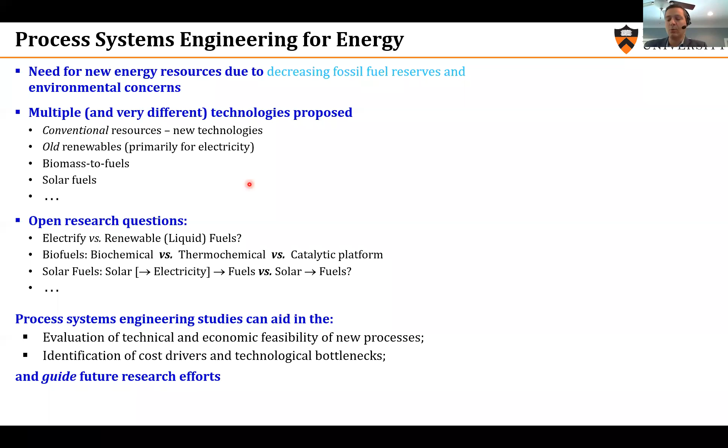So let me start with process synthesis. At a high level, there are two schools of thought in process synthesis. One is where we decompose the problem into easier problems. This is a schematic, a very simple schematic. At the very heart of any chemical processing facility, there should be a conversion, a chemical reaction. So the idea there is to come up with a design for the reactor network.

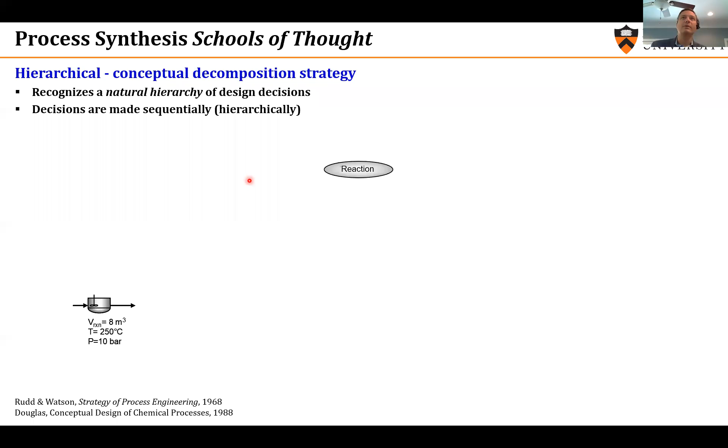Once we have made these decisions, obviously we will need separations, because in real systems, for example, conversions will not be 100%, selectivity is not going to be 100%. We will need to design a separation network around that. Then once we have made our decisions about reactions and separations, we would have some heating and cooling duties, distillation columns, we would have both of them. How do we then do heat integration? So around that, we're going to design our heat integration and potentially utility system.

So this is a very intuitive way to think about this problem, and very elegant, and can be very effective, because the problems are easier, but it does not account for interactions.

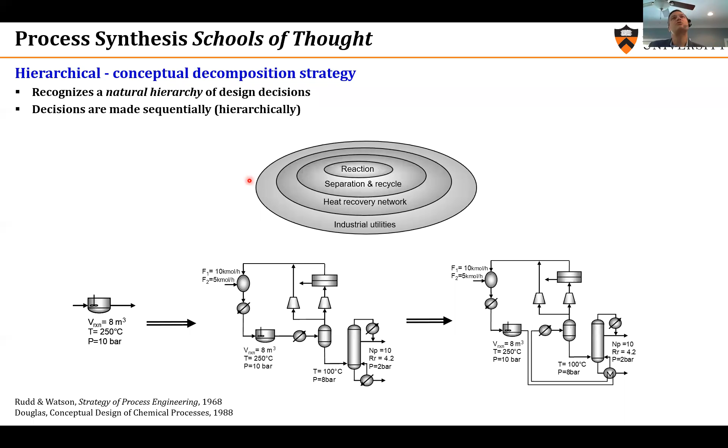The example that I often use is that when we are trying to, for example, maximize selectivity in a reacting system, we may do that, but by maximizing selectivity, we may lead to small production of a byproduct, which forms an azeotrope. So although from a reactor standpoint this is a good objective function, if we think about the entire system, that's not a good objective function, because with an azeotrope, our separations network now is going to be inefficient.

So what's the alternative? The alternative is what we call superstructure optimization, where all the options—although I'll come back to this, this is not a straightforward exercise to find all the options—but in principle, we would have all the options mapped in a superstructure.

So here I'm showing, just to illustrate the points, very simple decisions. We're going to install a CSTR or a plug flow reactor. So we're going to choose one of them, and we will either use a sequence of distillation columns or adsorption or membranes. So all the options are there. So it's not a process flow diagram, it's a network, parts of which are going to be activated and deactivated.

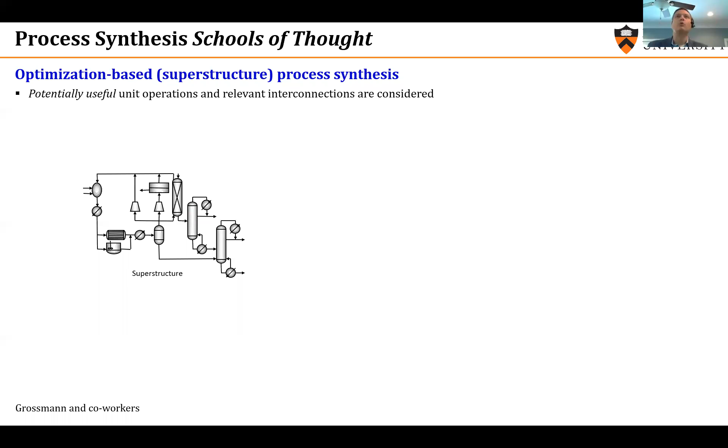How are we going to do that? We're going to generate a model that is different from a traditional process model because it has discrete decisions, binary decisions, these Ys.

And these Ys, if we can solve this model, which I have written here, will tell us which of these units are going to be active in the optimal solution. And then for the units that are active, we're going to calculate as we would normally do process flows, temperatures, pressures.

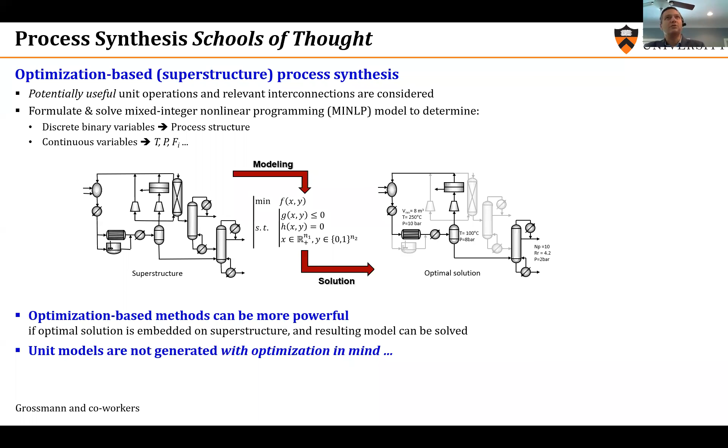So this approach appears to be very powerful, but it has a big, big challenge, and this is the computational issue. In the next slide, I'm going to show the equations that this process simulator would automatically generate if we were to perform a simulation. They are not meant to be understood, all these equations - I just want to convey the complexity.

So it's a multi-tube reactor for methanol synthesis. For the students in the audience, we maybe just draw our unit in Aspen or the preferred simulator - what is it really behind it? If it's a detailed simulation model, we would have lots and lots of equations like material balances, energy balances, kinetics, if we want to account for pressure drop, hydraulics, and so on and so forth.

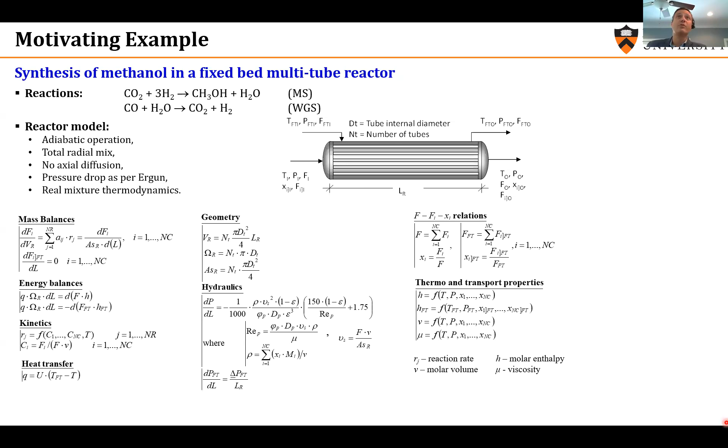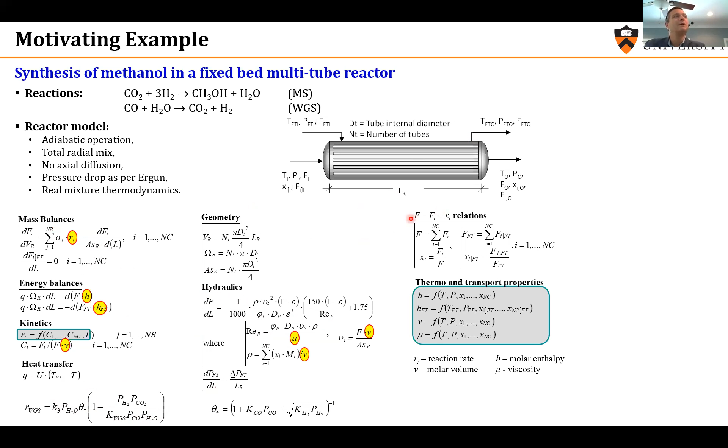And as if that was not enough, some of these letters here are enthalpies, reaction rates, molar volume - they are coming from additional equations, thermodynamics or kinetics. And the last point is that these kinetics, which in this case is water gas shift, would look something like this. We would have these partial pressures in the denominator, and when partial pressures go to zero, numerical stability issues and all that stuff can happen and hinder the solution of the use of these models in an optimization framework as opposed to simulation.

So what can we do? Simplify these models. And the idea is not ours - it has been around for many, many years. Here we are just applying it in energy and processing systems.

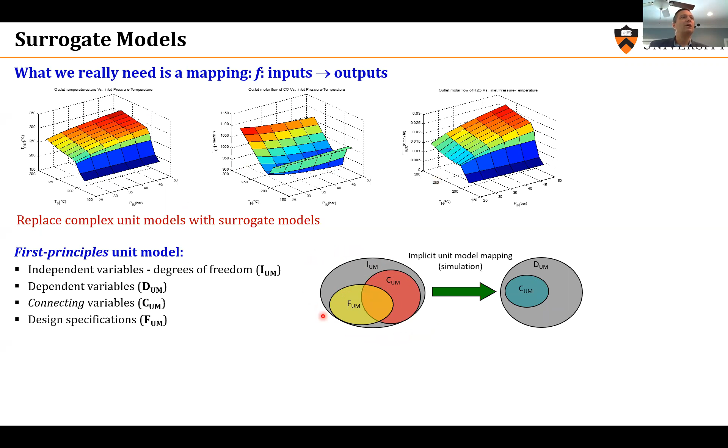So the idea is to get a complex model. Here, what I'm showing is all the variables that we need to have in order to calculate how our system behaves. An example would be in a distillation column, we would have to calculate compositions, flows, everything in every single tray, and replace these models with really a reduced version where some of the variables that are not of interest from a process synthesis point of view are removed.

Where we're connecting different units, these variables are removed. And it's an approximation, so we have to sacrifice something, but it allows us to solve bigger problems. So using again distillation column as an example, if we're thinking about a system that has 10 or 20 different units, maybe knowing what is in every tray is not that important. What is important is the feed of the distillation column, what comes at the top, at the bottom, and the heat duties.

Okay, so I'll go through this slide very fast. I'll be happy to come back later. There are two things then we have to do.

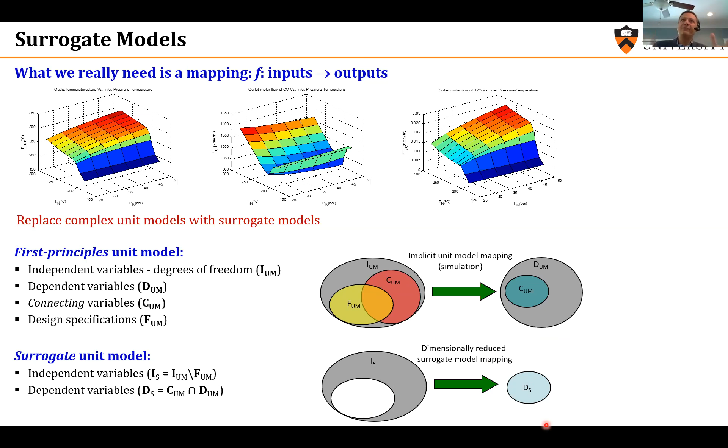Design this surrogate model, this approximation. It's not a completely straightforward question because we're going to remove - in the previous slides, I showed that basically we remove some variables from the original model. What we are left with should behave well numerically, should not be singular. And this turns out to be a graph theoretic problem where we form a graph with different variables and different equations. We solve this problem, and the solution is going to tell us what the right input variables should be. And from these input variables, we calculate the output.

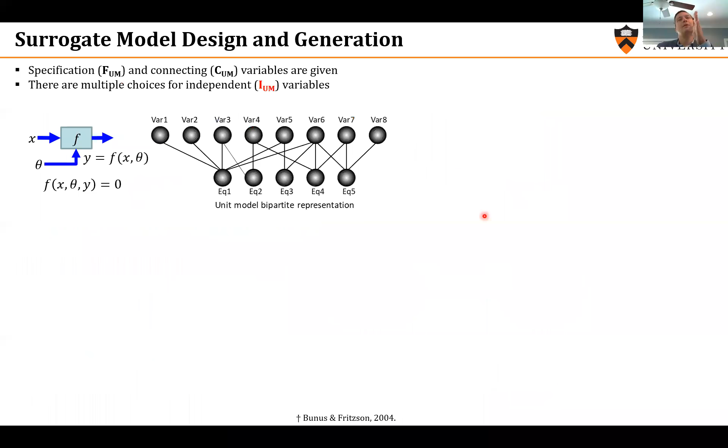The second question then is, how do we write this model? And we should not replace everything. This is a reactor model, and I'll just go through the first two equations. This first equation basically says what comes out of the reactor - this is a summation where all the flows are equal to the flows that go in plus stoichiometric coefficient times conversion. So this equation is very simple, very intuitive, and we don't have to replace it.

What's the tricky part? That this conversion of reaction happening in the reactor can be very tricky. Energy balances, similarly, relationships about temperatures - we don't have to replace them.

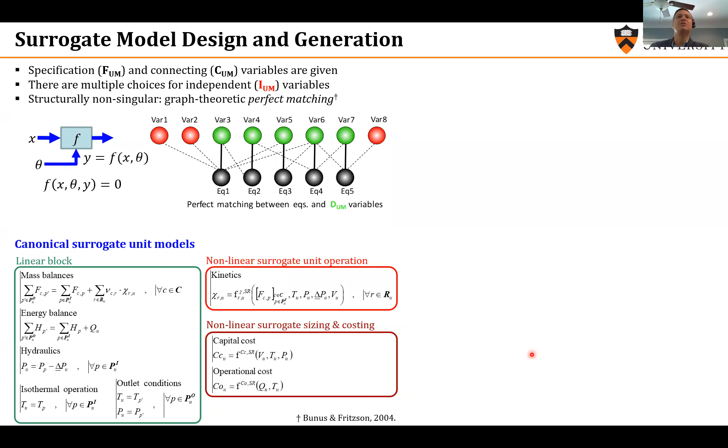What we really have to replace is this conversion, because it's going to depend on kinetics and it's going to be complicated. Once we have made these decisions, then it's a fitting exercise. I'm not going to go through the details. We can use different fitting methods.

Artificial intelligence is very trendy. We can use the preferred method for developing these simplified models based on data that come either from simulations for a given unit or from experiments. And actually, in our experience, a lot of systems that we have studied are based on experimental data coming from collaborators.

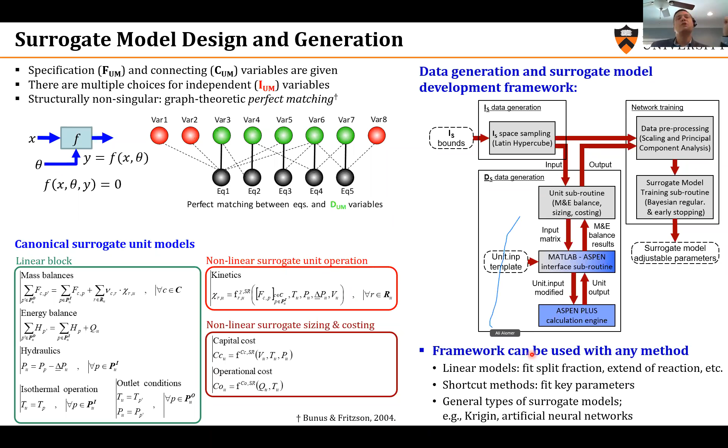Okay, so we have done that. We have simple models for each unit. Are we done? Unfortunately, there is one more step, and that's where now the optimization challenges come in.

I'm illustrating this through an example where, for the sake of simplicity, let's assume I have 3 reactors, and somehow we have developed a model where we have only 2 input variables, x1 and x2. But we still have to select which catalyst we're going to use in this reactor.

If we go with catalyst 1, this is the objective function. Let's say we're minimizing cost, given certain output. It is a very easy problem, right? It's a feasible region that is convex, a single minima. Even if it was like this, it would still be an easy problem.

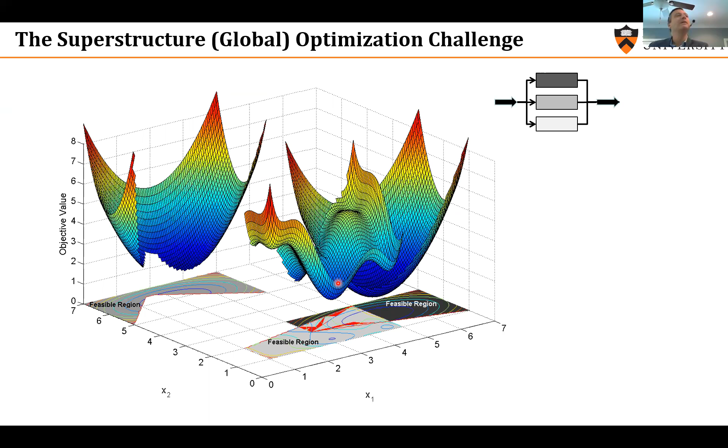But maybe the feasible region is not convex. It has this shape, which means that we have 2 minima, or the objective function has multiple minima. And really, the problem we are trying to solve pictorially is something like this. We have to first pick the reactor, and then for this reactor, solve the optimization problem. So this is challenging, and really the group is trying to develop methods to solve these problems.

This is my last slide on process synthesis. So in general, what we would like to do is develop good methods for solving these process synthesis problems. And as you will see later, one of the reasons we want to develop these efficient models is because we want to solve lots and lots and lots of optimization problems.

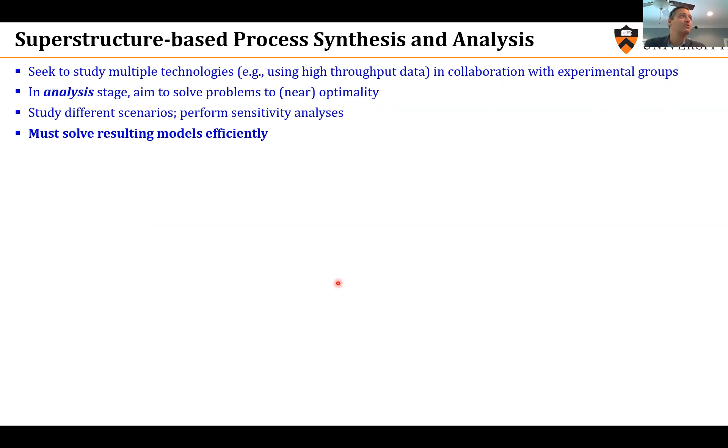Because this is for preliminary studies, right? It's not to build a facility that is going to be utilizing, let's say, the latest solar thermal technology. It's more to get the results that would allow us to understand these systems better. And to understand the systems better, we have to run many, many optimizations under different scenarios to really understand the drivers. So that's our goal.

What I described very briefly is that we can think of it in 2 ways. One is develop simpler models, and I will show later that sometimes these models are sufficient for these preliminary studies, and that experiments also can be used to develop these simpler models. That's one. Then at the second level, assuming we have these simple models, we want to develop good optimization methods for this class of problems where we're making discrete decisions and continuous decisions.

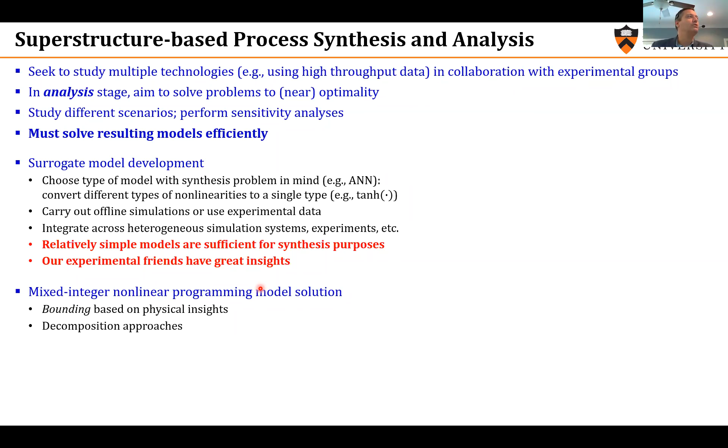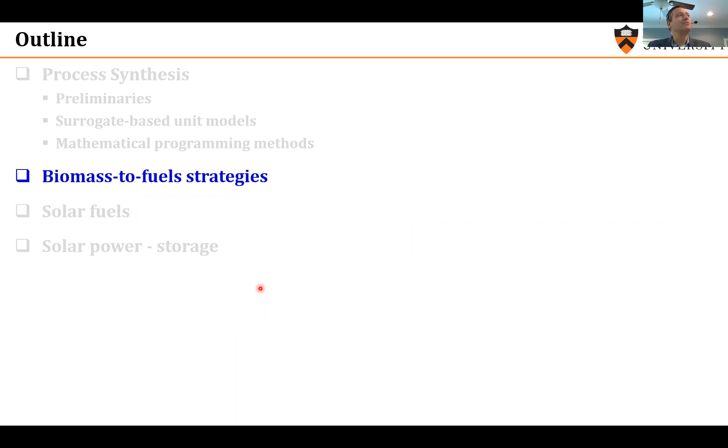Let me now go to the applications. The work has worked a lot in the area of biofuels, but I chose to focus more on solar systems. I still wanted to discuss two examples. The first one is just to illustrate how superstructure synthesis applies to a real case, a real system with experimental results.

So how we can use superstructure synthesis to think about the system. This is a pre-treatment of biomass. Biomass is harvested, is brought to the biorefinery, and the first step really is to break this very recalcitrant, very resistant mixture of lignin and polymers of sugars.

So a colleague of mine at the University of Wisconsin developed a series of pre-treatment technologies 5 years ago now. This is a very nice system from a basic science standpoint and a catalysis standpoint, because we are using GVL, gamma-valerolactone, which is a solvent that can be made from biomass, as the solvent to carry out this pre-treatment. So it's very efficient.

It has received a lot of attention, but the downside is it leads to a complex separation system problem. Why? GVL here is our solvent, so somehow we want to recycle it, we want to be able to use it again. Sugars is the valuable intermediate, or the most valuable intermediate, because it's what we want to convert finally to a chemical or a fuel.

Lignin, we also want to separate from everything else because it can be used to generate power. So how do we carry out this separation? One option, experimentally found, is that we can add salt. If we add salt into this system, we're going to have two phases: one is the aqueous phase, which has sugars and primarily water with a little bit of GVL, and the other is the organic phase, which has GVL and lignin.

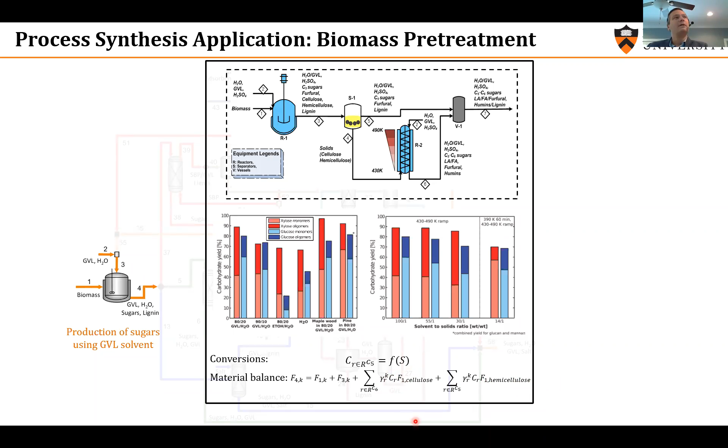So this was an example of a surrogate building from experimental data. Once we have this process network, separation network, we can start thinking about utilities, about heat integration, and the other parts that I described earlier.

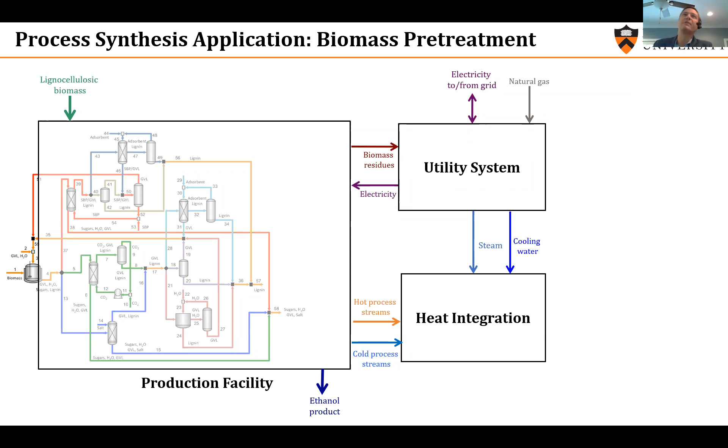Okay, so I went a little bit through the detail. I won't be doing that again. I will just now start presenting results directly from different systems.

Last slides on biofuels. In the States, there has been a lot of discussion about what are good strategies for converting biomass to fuels. The Department of Energy and others have suggested that what we really have to be doing is maximizing carbon yield. So we wanted to really test this hypothesis, whether the best criterion for choosing these strategies is maximizing carbon yield.

That is, the carbon in the final fuel given a fixed amount of carbon in the input. So to do that, there are 2 systems. One is the very traditional ethanol, biomass to ethanol, and then another one, which again was based on experimental results from our collaborator Professor Dumesic, going to alkenes. So these would be hydrocarbons, basically using chemical catalysis.

At a very, very high level, in these two figures, panels A and B, I'm showing just the final results. We see that if we are producing ethanol, we start from 1 ton, which has a certain amount of carbon in the 3 major components, and finally we get 159 kilograms of carbon in the final product, in ethanol.

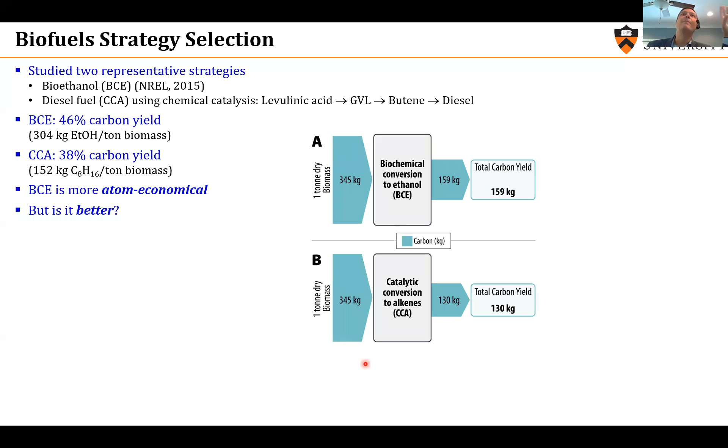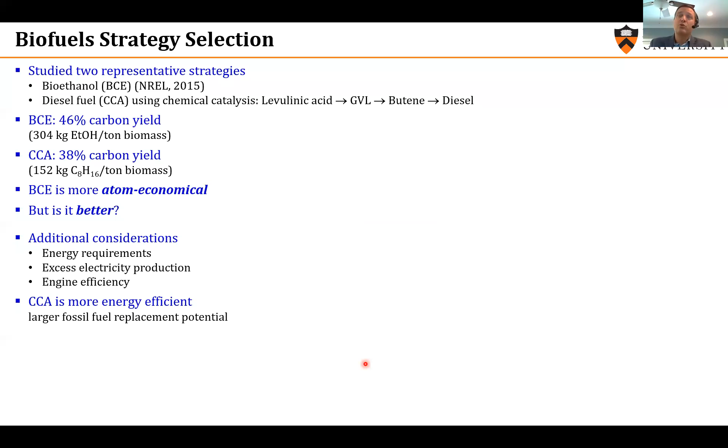So I'm going to be showing in the next animation a different figure. It has the same reference, but we are thinking about energy flows, not carbon flows. And we would like, when calculating these energy flows, to also think about excess electricity that can potentially be produced in the biorefinery, because remember, lignin can be burned to produce electricity.

And also the final use of this fuel. So again, here we have 1 ton of biomass as the starting material, but everything else is energy flow. We are producing this amount of energy in the form of ethanol, still more energy than in our liquid fuel, but two big differences. One is that one of the reasons this yield is lower is that some residues cannot be converted to fuel in this case, but they get burned.

So if we think now, this biorefinery produces more excess electricity, which is going to be used, to keep the same reference, by an electric car. The electric motor has higher efficiency. So finally, if we do the calculation in terms of total mechanical energy, which is a better equivalent of the fuel that would be displaced, we find out that this is a better option. This biorefinery would displace more fossil fuel than this biorefinery.

The conclusion of this study really was that it's not only the carbon yield, but it's also the biorefinery efficiency, because this is reflected in the amount of excess electricity that we're producing, and the fuel quality, that have to be taken into account when we are deciding what conversions to make and what strategies to adopt.

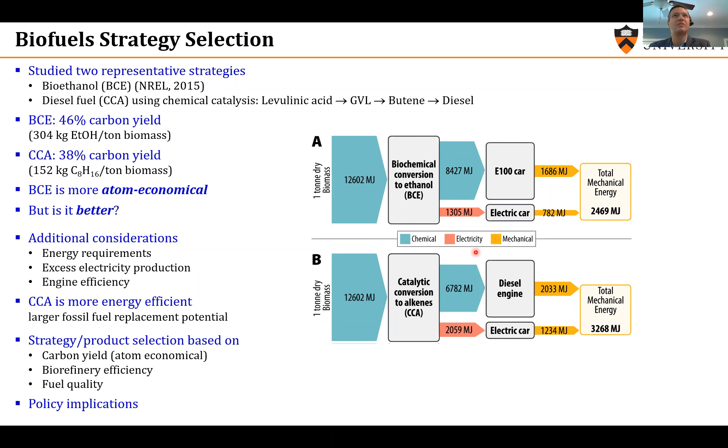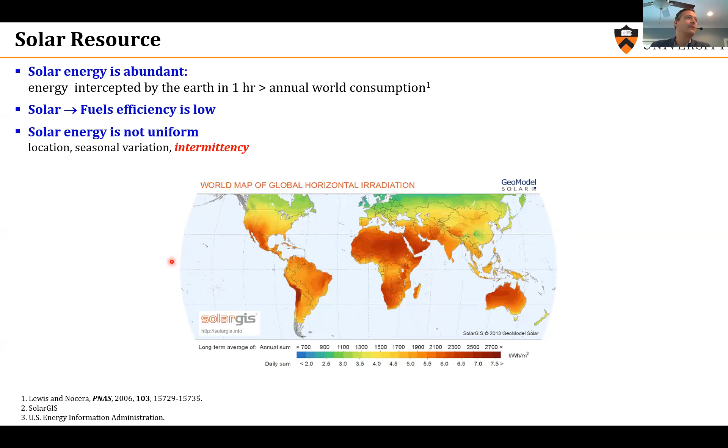So, what we would like to study in this part of the talk is to understand how to use solar energy to go to liquid fuels, not electricity.

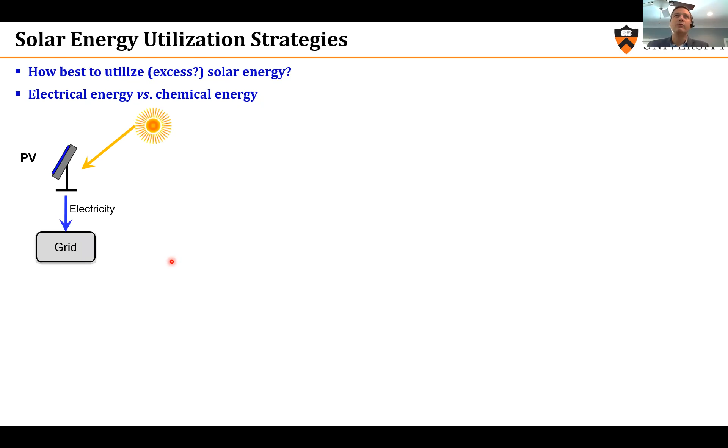Now, just to set the stage a little bit and put everything in context, if we ask the question, how is it best today to use solar energy to go to liquid fuels - and many papers have shown this, this is not our calculation - it seems that this is the best way. We still go through electricity, but then we use excess electricity to do electrolysis. And then once we have hydrogen, we can go with hydrogen to liquid fuels. This pathway has an overall efficiency of roughly 7%: 30% photovoltaic, 80% electrolysis. These numbers are rough. You may disagree, but they give you a rough idea of the efficiency of this pathway.

Now, before we continue, an interesting observation is that if we stay with electricity and we use storage - we're not talking about cost right now, just efficiencies - actually, using it directly in an electric motor has higher efficiency. But we still need liquid fuels for planes, heavy trucks.

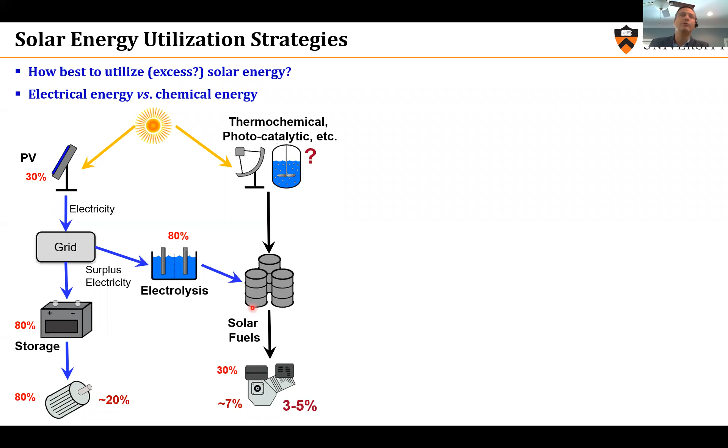So the question is, given that this appears to be the best pathway to liquid fuels today, what would it take for a direct conversion of sunlight to liquid fuels? How good should we make this direct conversion to compete with the current pathway? What would it take to reach, let's say, 3 to 5% efficiency in this direct conversion? I'm saying 3 to 5 because I haven't accounted for the conversion of the incorporation of the renewable hydrogen into a liquid fuel.

So we would like to study this really direct conversion, which is not so direct, is not a simple block. The idea would be to have what we termed a solar refinery, where we would use solar to generate utilities, heating and electricity that may be required, for example, for pumping, but not for the chemical conversion. There are many different technologies that have been proposed for these direct conversions. We are not going to focus on the specific technologies. We want, at a higher level, to ask how good should these conversions be to reach this type of numbers. And then potentially CO2, the carbon can be coming from capture, the water can be coming from other sources.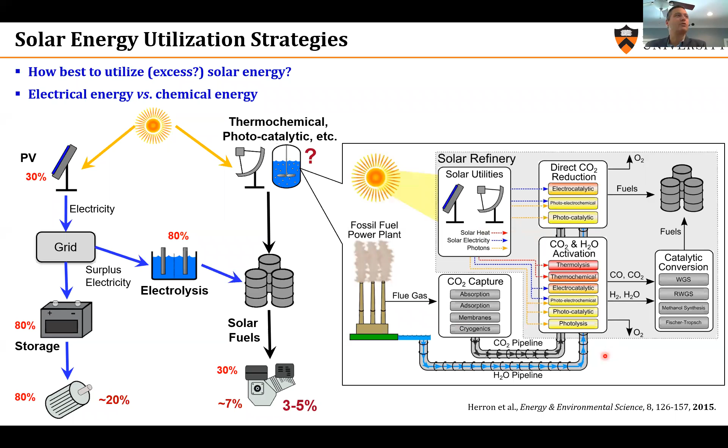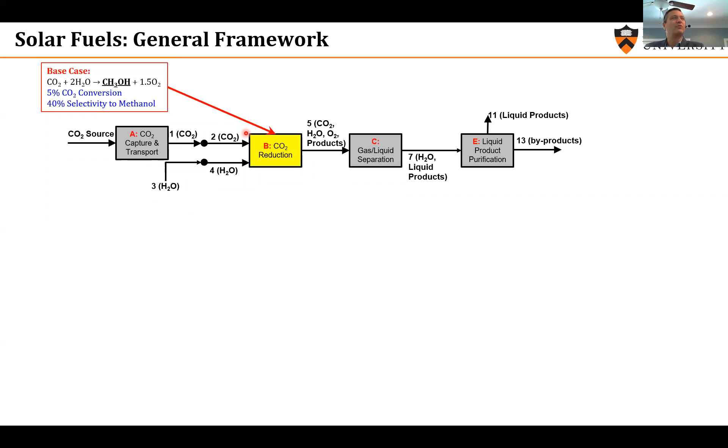We went to the literature. This is now a few years old, but I believe that these numbers are still relevant: 5% conversion of CO2 and 40% selectivity to our methanol.

At this point, we are spending 7 times more than the energy that we are producing, but we have started at these low numbers. So then the question is, what advances are needed in catalysis and reaction engineering to make this system better?

One note about the metric that I will be using. I think what sometimes is not thoroughly appreciated is that we should have a common energy basis. So one could say, okay, we do the simulation, optimization, we get our flows, temperatures, and we calculate heat and electricity required to run this system. And we compare this heat and electricity with what we are producing here.

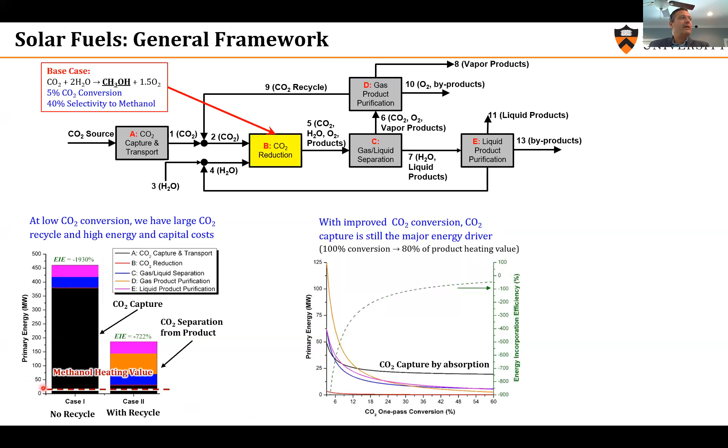Okay, so let's see some results. Maybe another thing I want to bring to your attention: the energy present in 1 kilogram per second of methanol is roughly 23 megawatts. So this is the energy requirements to run this facility as we increase conversion and change the energy required to capture CO2. As expected, we see the energy decreases as we move here.

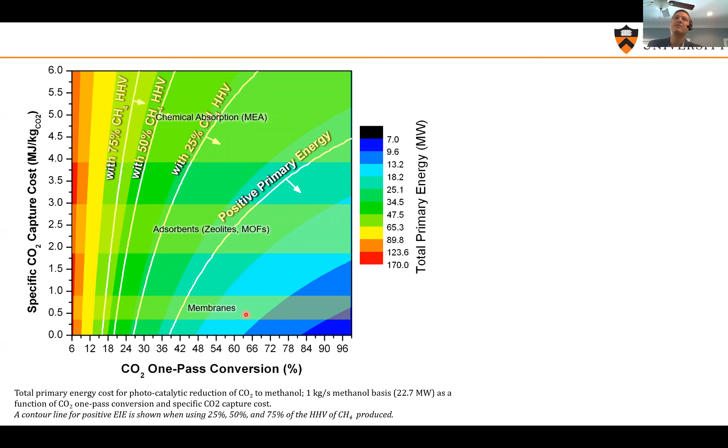I want to show some numbers about cost. What we realized very soon is that block B, the yellow block, which is about the reduction, is very, very expensive. The activities of the catalysts are very low, so we would need very big reactors. The reactors would be expensive, the catalysts would be expensive. So this is definitely the cost driver.

The minimum selling price can be viewed as the break-even price, the price at which we should be selling our product to just cover our expenses. So the higher this minimum selling price is, the worse the system is. We want low minimum selling prices, indicating that we are breaking even without selling the product at very, very high prices.

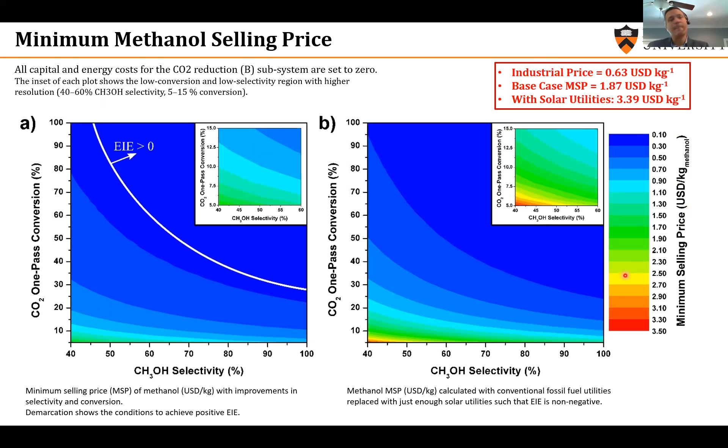Okay, last part of the talk: solar power and storage. We're going to be using concentrated solar power, although it could be used also with another technology for the production, let's say parabolic trough or other systems. We want to think about how we can use solar energy when the sun is not shining.

We are going to be using kind of an exotic system. We are not obviously the first to think about this problem. Photovoltaics combined with batteries have been studied. Concentrated solar power with two tanks, where basically during the day we are generating a very hot liquid and using it during the night, has been studied.

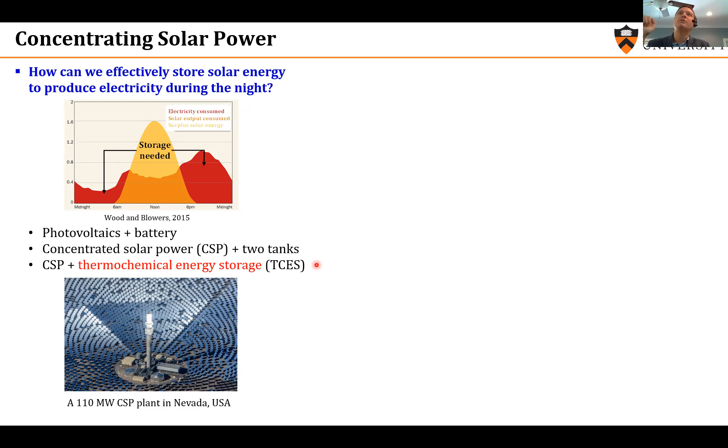What we want to understand a little bit better here is thermochemical energy storage. So we are running an endothermic reaction when the sun is shining, producing a high energy content product or mixture of products. And during the night, we run the reaction in the other direction, producing heat, and we're using that heat for electricity production. So that's the idea, and this idea leads to a very interesting process synthesis problem.

It's a very interesting process synthesis problem because it's not the typical problem where we are thinking about a nominal operating point and then relying on control to keep us there at steady state. We have two completely different modes of operation. During the day, we run the endothermic reaction.

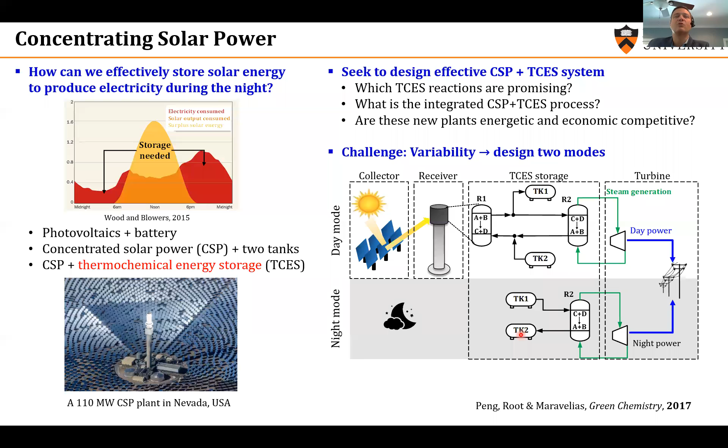So early morning hours, this is full, TK1 is empty. So this is a very interesting system. I'll just spend one slide explaining why this in a way leads to a new type of process synthesis problems, because we have uncertainty, we have variability, right?

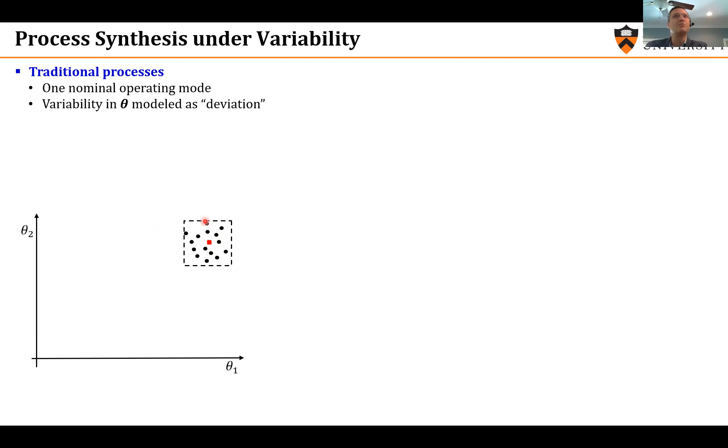And if this is the nominal operating point, a lot of research has been done around designing systems around a nominal operation, right? The feed may not always be the same in terms of amount and properties. The specifications may be changing. So a lot of work has been done around designing around a nominal point.

But here, we have a very different situation where really we have to design 2 different systems linked together. So we have the day operation and the night operation. They are very different, but they are linked. They are linked through these tanks.

We use a technique that is called stochastic programming to account for variability, right? Summer and winter are not the same, both in terms of solar irradiance and duration of the two modes.

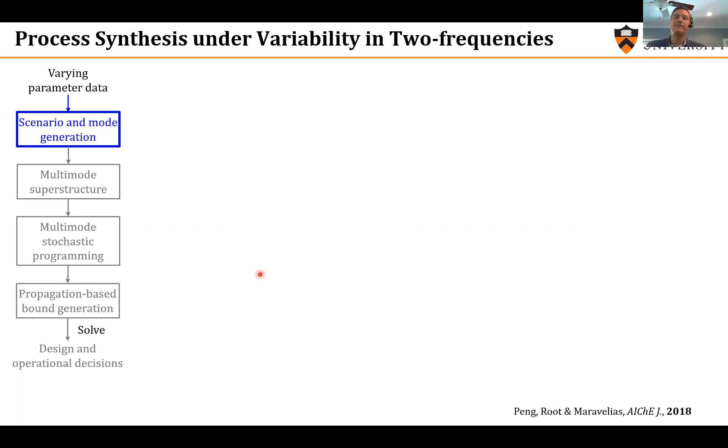So we generate these scenarios to represent an entire year. For each of these scenarios, we generate two modes. We generate, so this is shown here. For each scenario, we have day and night. Again, different days and nights in the different scenarios.

And now our design decisions is what do we pick and how we operate in different scenarios. So these are, in this work, we just used 6 scenarios. We felt that it was representative.

Directly results. The chemistries that have been studying the most are gas phase chemistry. So from ammonia going to hydrogen and nitrogen and back, and then methane and CO2 going to syngas and back.

Underground storage is, I would say, maybe a little bit of an ambitious idea that we can use underground caverns to store these systems. I don't know how feasible it is, I have to say that, but we just wanted to include it in our analysis.

And it turns out that these systems, so when we are using really gaseous products, are not competitive. The reason is that we need so much energy to compress the system, and the compressors and the tanks are expensive. I'll just show here the big picture energy flows.

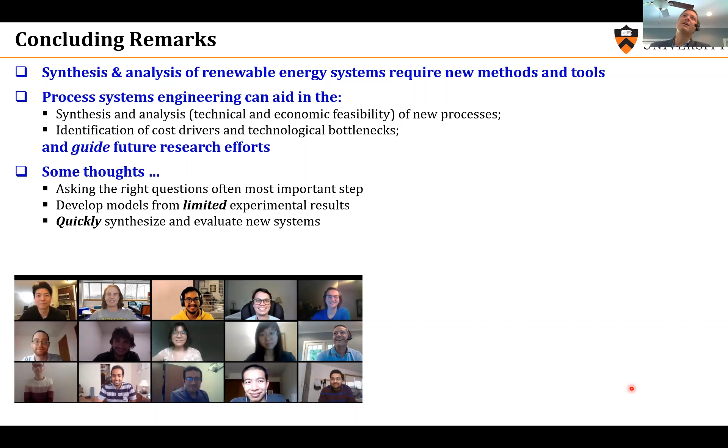And then finally, it's also important to quickly synthesize and evaluate new systems, because research moves very, very fast. If we want our analysis to have some impact, we would have to be able to build these models, get the results fast, so we can have an iterative procedure where the insights are then used for the design of the next steps.

I want to acknowledge the group - all the work, of course, is done by the group members. This is the latest photo from a Zoom meeting. This is, I think, what is going to be happening for some time. And then also some collaborators and financial support.

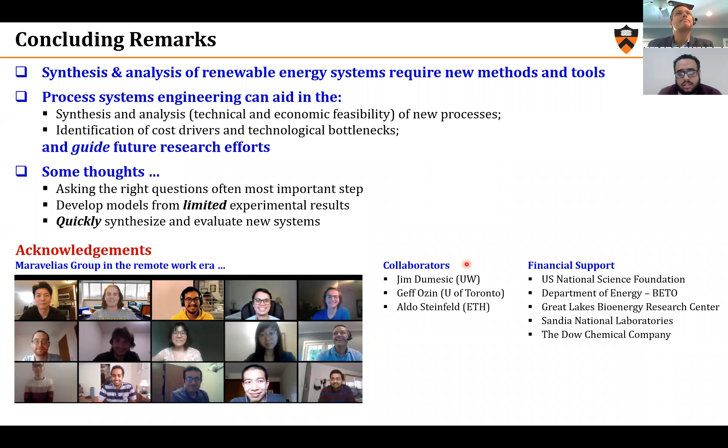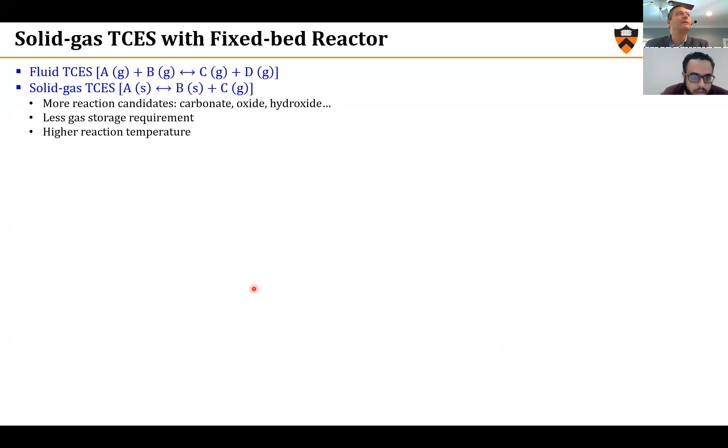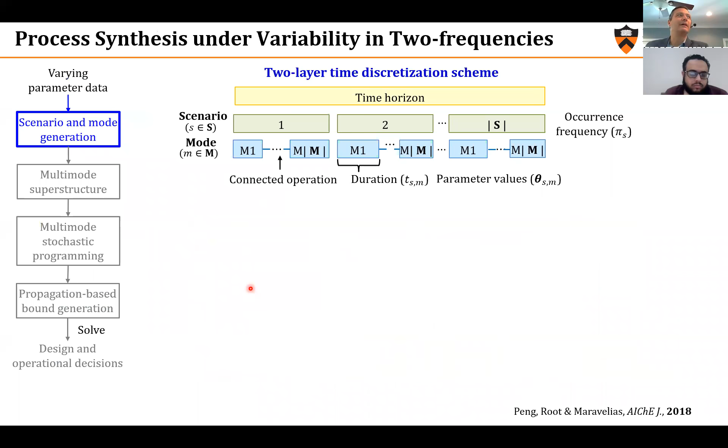Both of them have to do with ammonia. The first one: did you apply the canonical surrogate unit models to ammonia synthesis processes? No, so this was really equilibrium. We assumed that we reach equilibrium, because these two reactions take place at different temperatures, and really we exploit the different equilibrium at the two different temperatures.

I guess I was talking about, or maybe I was talking about the conversion, the slide where you had that you can approximate the conversion of the reactor through experimental data.

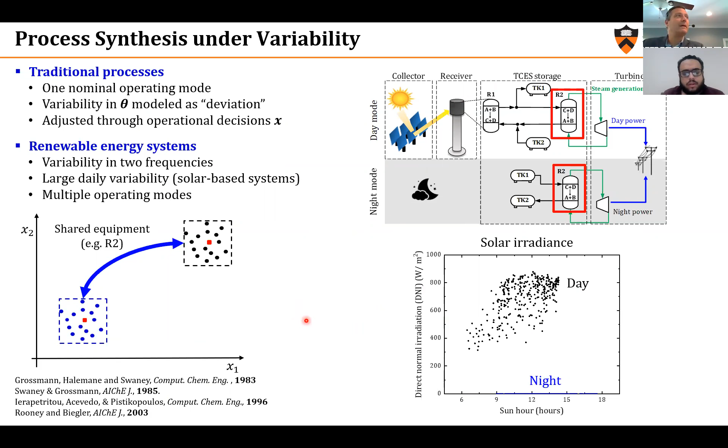So in the solar part, we didn't use any experimental data. Everything was based on modeling. For this reaction here, we are carrying it at different temperatures when we are running the exothermic and the endothermic part, and we really take advantage of the move in the equilibrium.

So basically, you modeled the... I guess this is ammonia decomposition to hydrogen, and the idea is to use ammonia as a hydrogen carrier, correct? And you store this ammonia and then convert it later to hydrogen. Yeah, so this is really in the loop. This is what we're using inside the loop as, let's say, instead of steam in our cycle. In one way, we are using the gases and then we go back. So we don't use hydrogen as a reactant, I mean we do, but it's really part of the loop.

Okay, and you modeled that reaction just as an equilibrium, basically. Yeah, reaction. Yeah. Okay.

So then my last question is, you really had a very nice case study on the electrochemical conversion of CO2 to methanol. Did you extend this case study to other methanol synthesis processes?